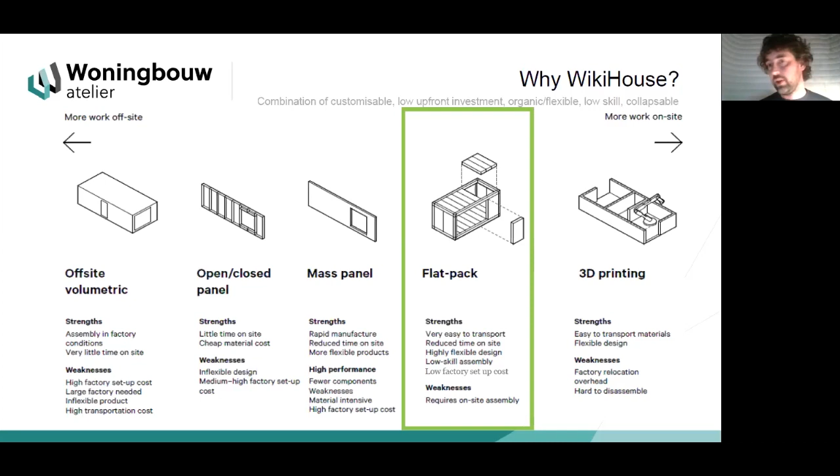And talking a bit more about that, the cost for setting it up, that's quite important to the actual product you deliver in the end. Because if you remember that offsite volumetric system, that needs a massive factory, that needs very high investments up front before you can actually start to produce. And because of that, continuous production is key. And because of that, it's quite top down, quite inflexible, but you can deal with big amounts.

WikiHouse is the opposite. So you need a CNC mill, CNC machine. They're already there. They're used by furniture makers or whoever wants to play around with a CNC machine. And that's the main investment you will have. And after that, you need a drill to be able to put your different WikiHouse elements together. So that's a very low upfront investment. And because of that, it can be more organic and more bottom up. And so you can facilitate the demand of end users much more.

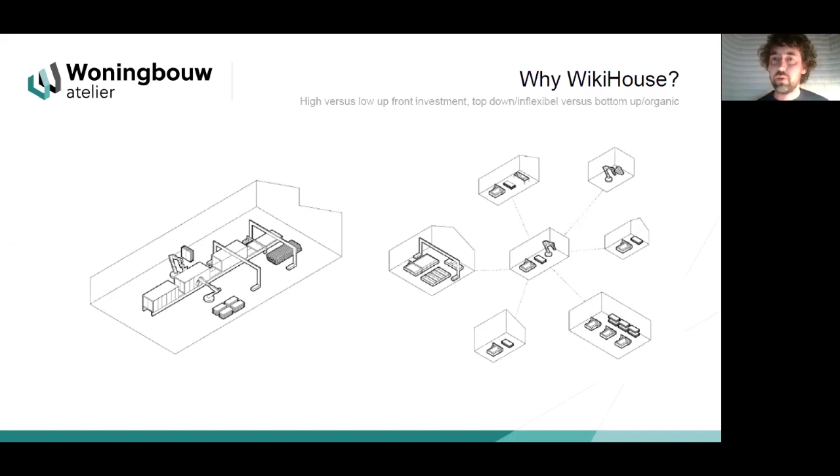Another reason it's affordable, mainly because it's a self-building system, so you can put it together yourself, which means you don't need a contractor, you don't have to pay laborers, etc. And well, that is needed because there's a big demand for affordable housing.

The house you see right now is a new build offered in Almere at the moment for almost 350,000 euros. It's a family house, and completely box standard, nothing special, and built by a contractor.

If you compare that to a house that we're building right now in Almere using the Wikihouse system, that is a house that is customized. It's built by the future owner and is going to cost around 235,000. So there's about 100,000 difference there. So it's much more

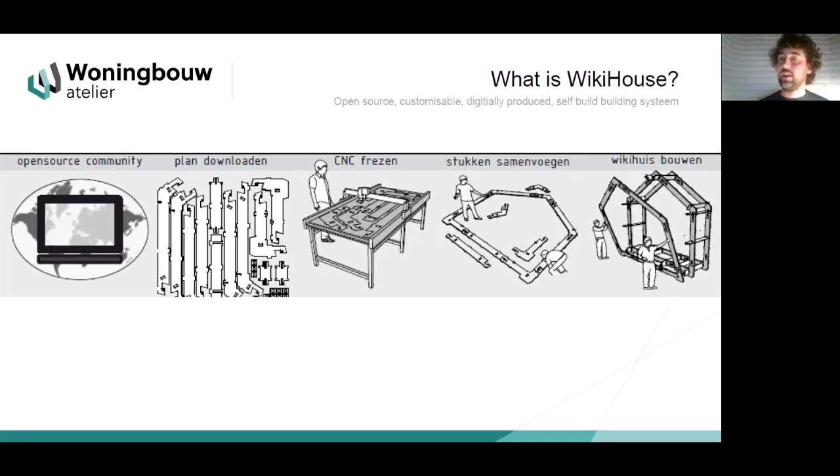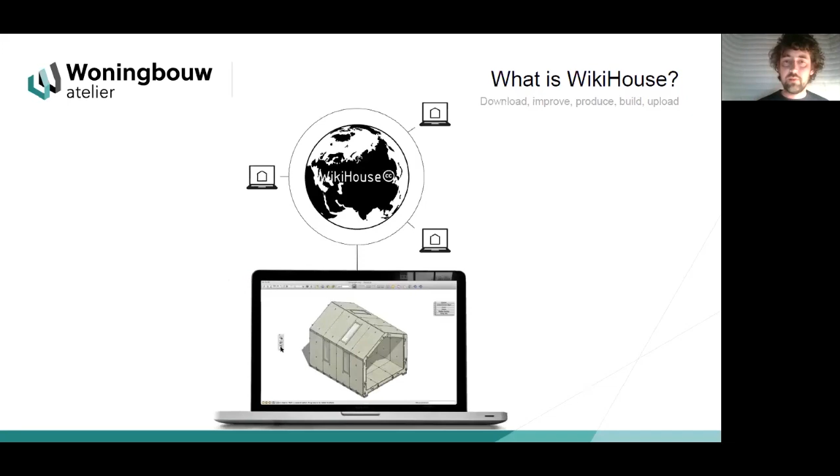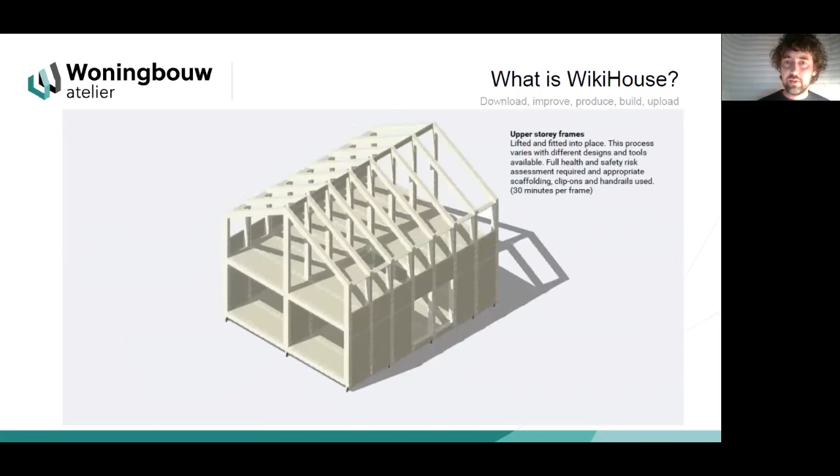skeleton of your house. It's open source, so you can use all the knowledge that's already available and supplied by others in the world, and use it for your own project. So download a design, for example. You use it to produce the elements. You start to put the elements together, and that's how you build the skeleton, the Wikihouse skeleton. Up to here is really Wikihouse.

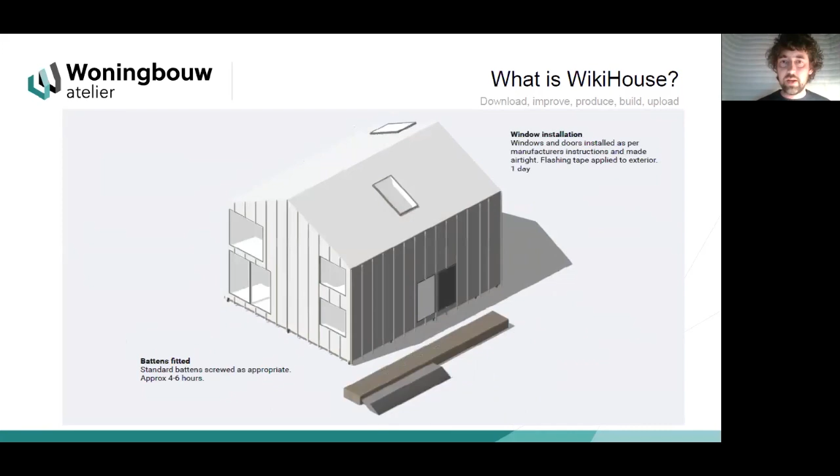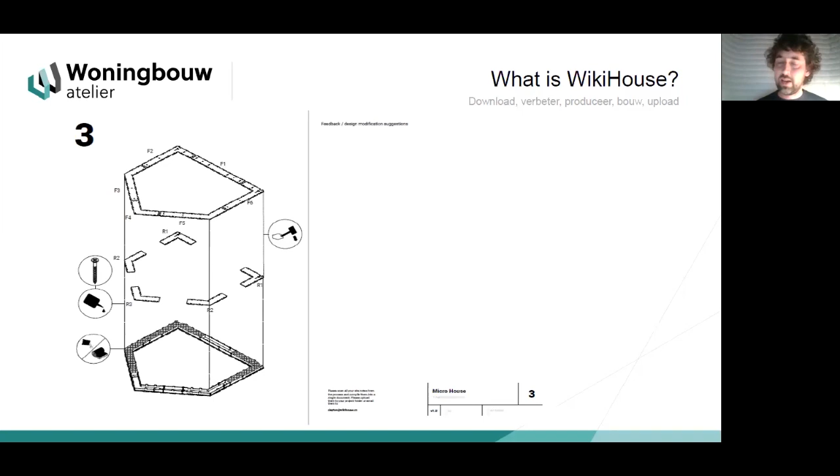After this, you finish it the way you want to finish it. So cladding, insulation material, installations, it's all up to you. Comes with a manual, bit like the IKEA cupboard manual. So it explains completely how to build the Wikihouse skeleton. This is a very important step.

After you've done your build, you just get all the data, the knowledge, the experience together, and you give it back to the Creative Commons, because that's how the system can become better and better and better. And someone else in the world can use that information to do their own project. So that's a very important step.

Now, we wanted to use the Wikihouse system in Almere, and we're doing that sort of in two projects. We did one in 2018, and we built a pioneer's house, which was a show and a test model. So a test model because we wanted to know if it would pass Dutch building regulations, but also a show model to just show to people that it actually leads to a house that works and looks nice and you can live in it, etc.

And it looks like a normal house if you wanted to. So those were the sort of two reasons to do this first step. We wanted to test it and show it.

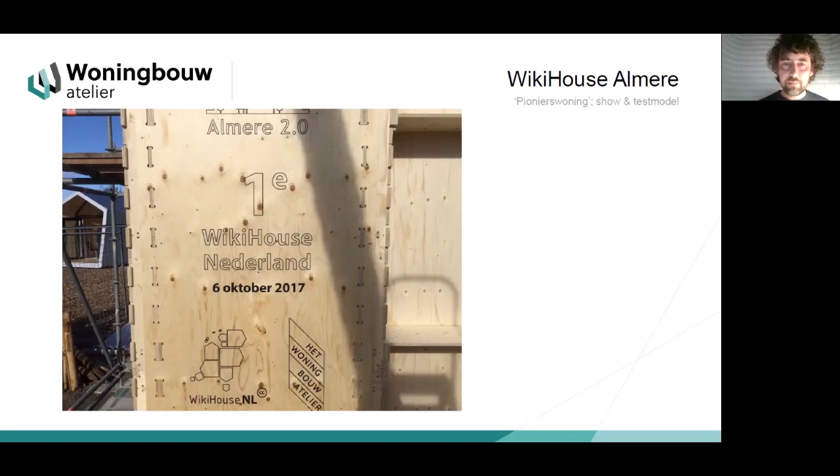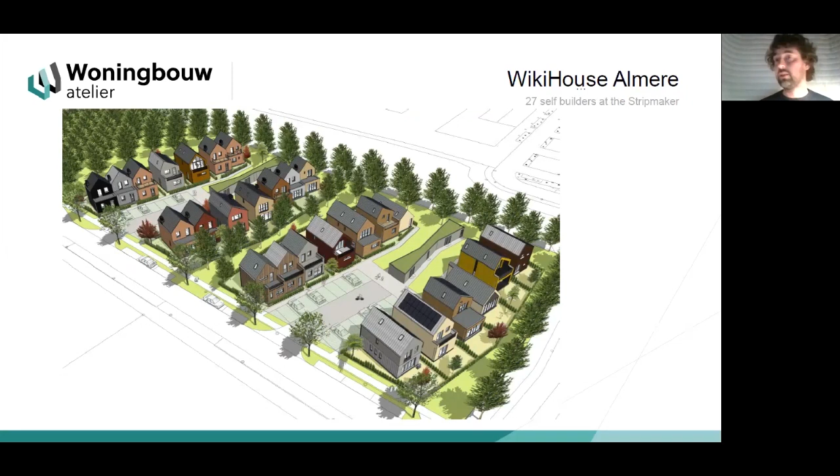Well, that was successful. It passed the Dutch building regulations. So the second part of the project is building 27 Wiki Houses with self-builders who finance it themselves, design it themselves, develop it themselves, and go and build it themselves. We're using Interreg subsidies, a European Union subsidy, to make it all possible. But actually, there's not a lot of that money going to the actual project, but much more to the process around it.

You see our self-builders that are building right now in the first phase. The first 9 of the 27 are going up right now. And they started building last July. And just a couple of pictures to show you how it works.

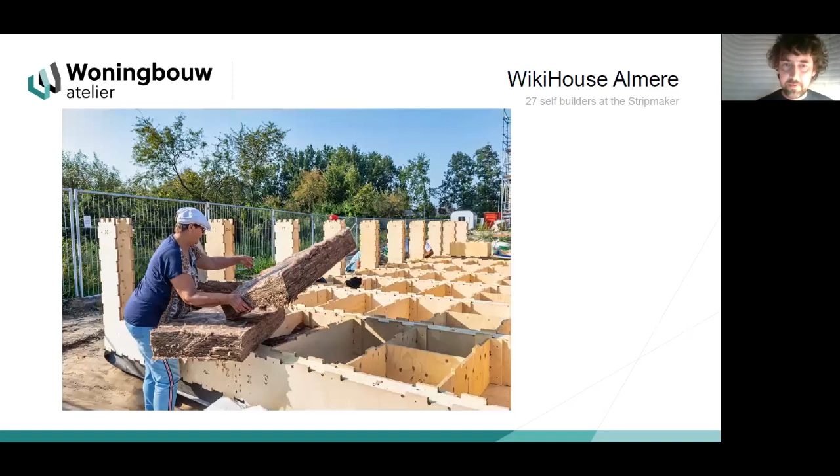Here you see the elements and the sub-assemblies which are put together indoors, on site, but indoors. Then these are brought to site and put together and insulated. And this is how the Wiki Houses are going up.

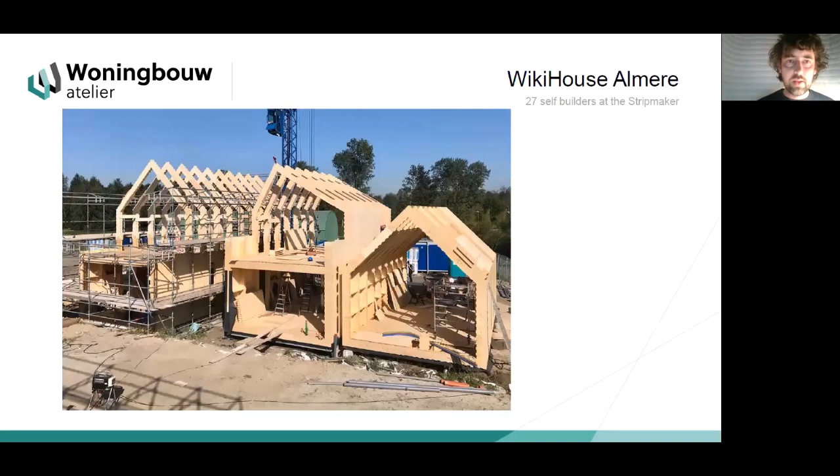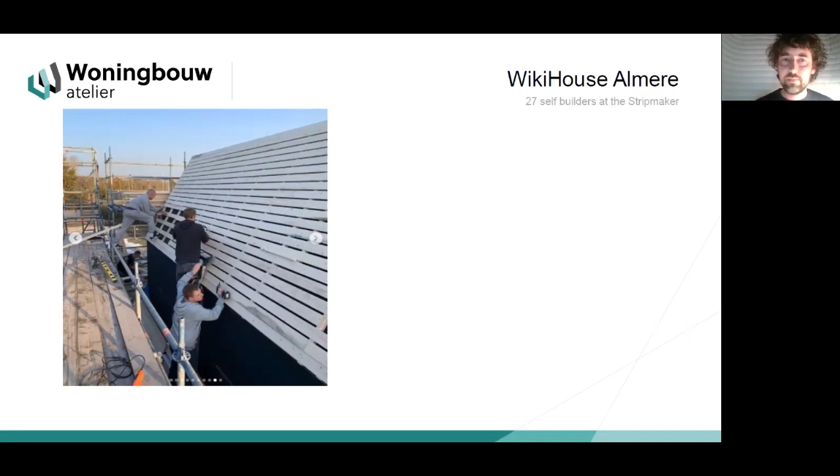These are all family members and friends that actually worked on this particular Wiki House. So these are all self-builders, volunteers, family members, people that don't have specific knowledge in building, but they can do it because it's made so simple that anyone can do it. Well, there you go. This is what it looked like about 4 weeks ago.

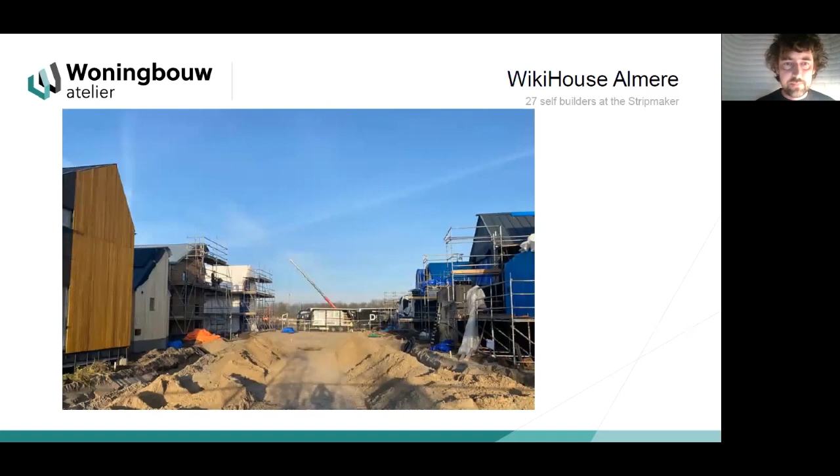We've started with the second phase, doing the designs in October. We just applied for planning, and we think we can start the build of the second phase, which is 18 Wiki Houses, in June, July this year. This is an overview of what it's going to look like. 27 houses in 2 phases.

We've got 16 future owners, but also 11 future tenants. So we've got a specific housing association involved that facilitates people that want to self-build but can't finance it. So they will finance it, and then the self-builders will rent the house from this organization. So that's 11 future tenants. The houses are 50 to 90 square meters living space.

Total costs in the first phase, so that's land development costs and building costs, range from 165,000 up to 235,000 euros. If you need a mortgage for, let's say, the 165,000, that will give you a monthly cost of around 450, 500 euros. On top of that, you've got the energy bill, but the energy bill is pretty low, so that will be around, let's say, 20, 30 euros. So the cost for housing for that 165,000 euro house will be around, let's say, 500 euros.

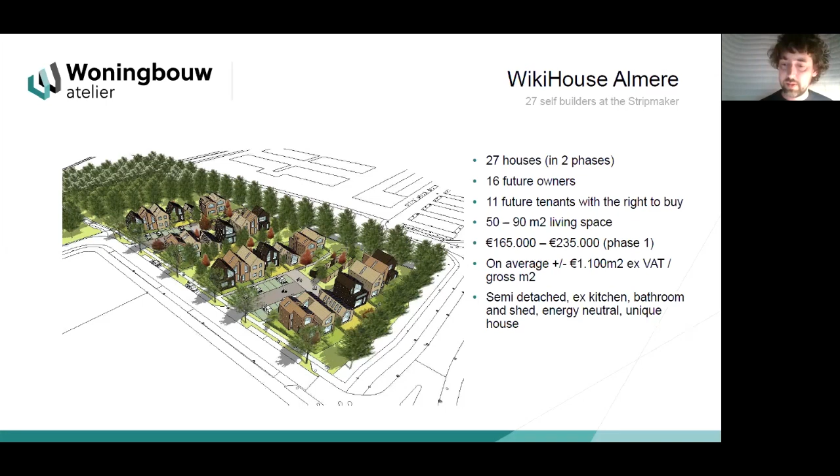On average, the costs for building are around 1,100 euros per gross square meter. And that's for a semi-detached house, excluding kitchen, excluding bathroom, excluding shed, but energy neutral, and a unique house because it's completely customized.

So this is a bit less related to the project, but a bit more about potential future projects and making that possible. We created a toolbox, which is a sort of library of modules which you can put together, so you can make your own design. And we know that all these modules work, so they're structurally sound. Max span is 4.8 meters.

They're all engineered. We've got the CNC files ready for most of them, not all of them, but for the modules that we have used up to now, we've got engineered CNC files. We know what the price is in Holland, of course, and they will be open source available. We haven't uploaded them yet, but that will happen. And our hope is that this toolbox and library is going to grow and grow and grow in the future. And the more it grows, the more flexible the Wiki House system can become, and the more varied you can start to design.

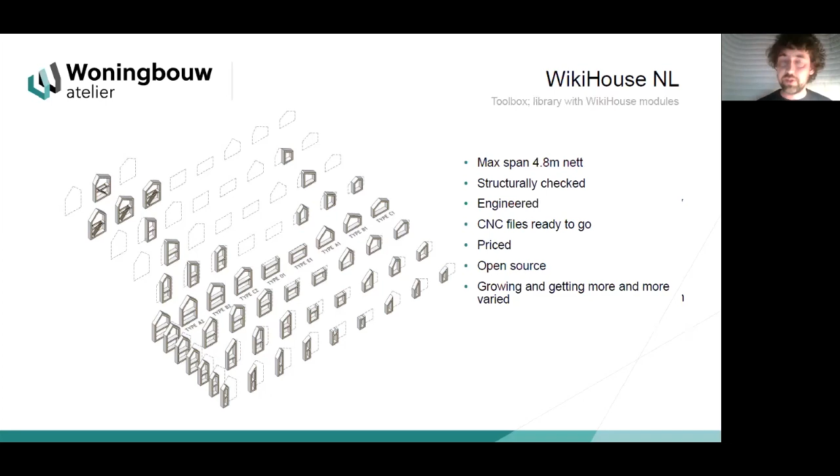This is an example of what you can do using these modules and the toolbox. And we actually 3D printed them, and these little modules were used in the design phase for the people who are building right now, and that worked quite well because you could see what it was going to lead to, not only for your own house, but also how your own house relates to your neighbors and what might happen with sun and shade.

And they were inspiring each other. It's like, oh, that's an interesting solution. I might do that too. So just playing around with that toolbox helps to make a better design, not only for yourself, but also potentially for your neighbor or the group.

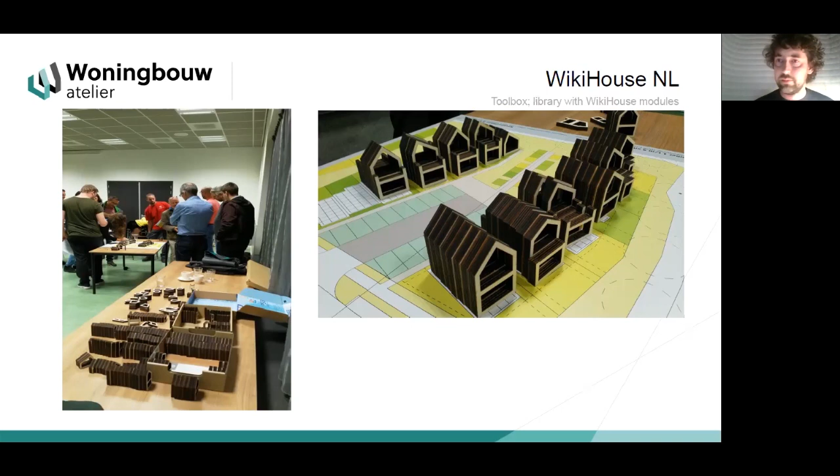We use the same toolbox to create a VR tool. So you can drag these modules you just saw onto your plot in VR. So you select the location, you select the plot, you put your modules on there. You can put interior walls in, you can put windows and doors in, you can adjust materials for cladding and

roof, etc. You can put furniture in, which I think is really important, especially for people that don't have design experience, who aren't an architect. The only reference point they have is the furniture that they have already in their house. So that's their reference point. So you need to be able to put that in the design and then actually walk around it in VR to see if your design works or not. And if it doesn't work, you adjust it.

So you can walk through the design you've made yourself in a one-to-one experience. The position of the sun you can adjust, so you can see how it works out with sun. And that's only for Holland, I'm afraid. But the costs change real time. So the moment you put an extra module on your plot, you see the cost rising of the development you're doing.

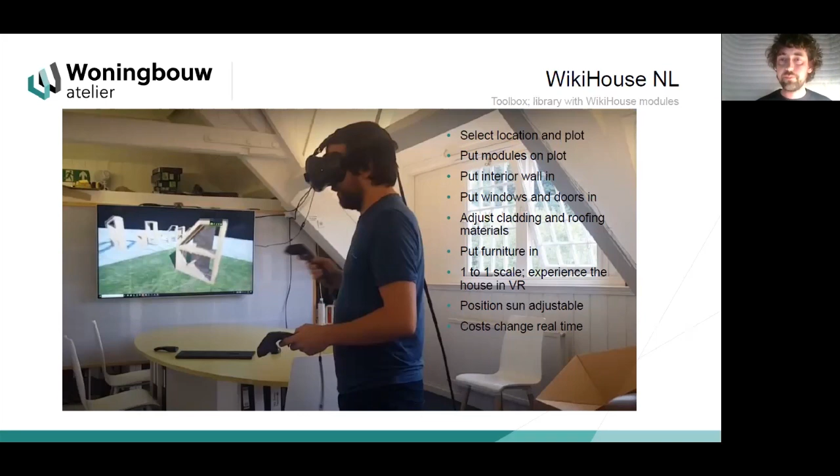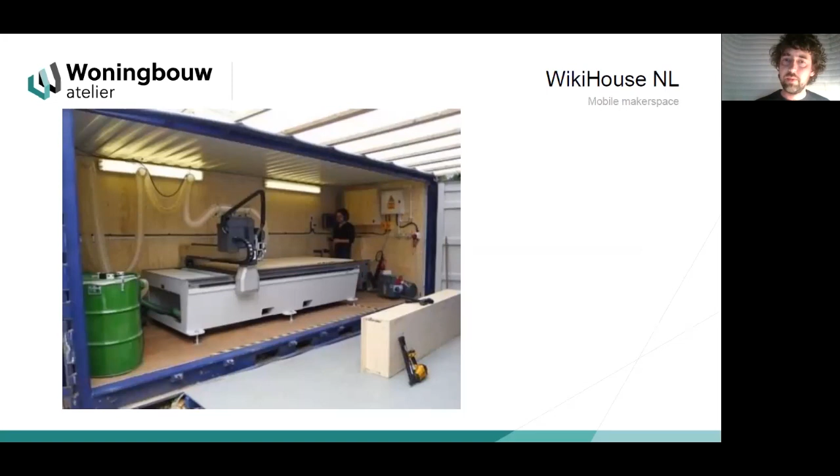We also created a makerspace, which is a container with a CNC machine in it, which can be hired, and we can just truck it to wherever the plot is, and you can cut your own files. So you can use this makerspace just as a self builder.

Now, what we've done in Almere is sort of hardcore WikiHouse, because the people that are building there at the moment have done everything themselves. So they did the designs, they did the development phase, they got their own finance, and they are building everything themselves. So it's really the hardcore version of WikiHouse, which we wanted to do because we wanted to test that extreme. That doesn't mean that all the projects that might follow have to be that extreme too.

And there's two things you could potentially change: the amount of work you do yourself and the amount of customization. And if you see them as an X and a Y, you can imagine a palette of options you might have playing with those two factors. So you can imagine a design that's completely not customizable, but because of that, really affordable, and you build it all yourself, then you end up at the really affordable side of the WikiHouse options you have.

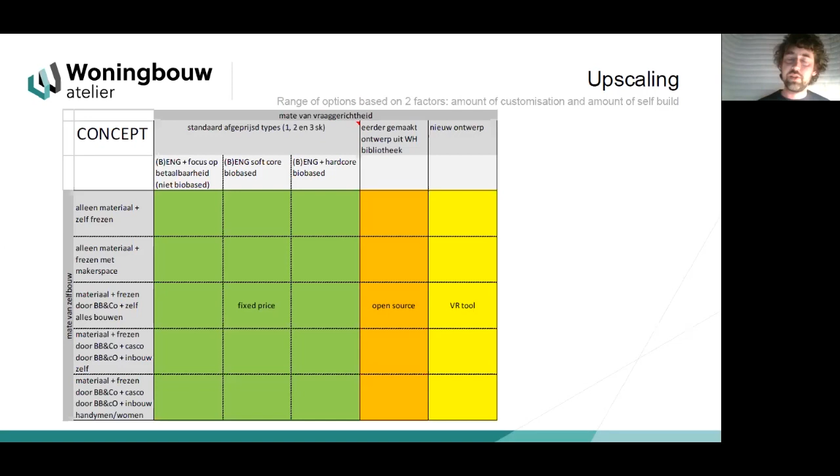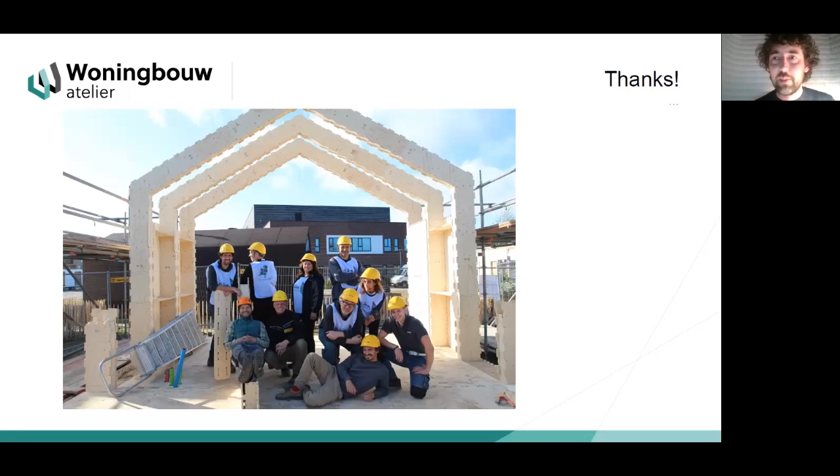Well, this is what I wanted to share with you guys about what we're doing and about the WikiHouse system and about the future of the WikiHouse system in Holland and potentially wider in the world. And yeah, let me know if there are any questions. And I think Bronwyn might do a bit of moderation of questions. Bronwyn.

Hey guys, yes. All right, let me start with some questions. Okay, so tell us about the WikiHouse Toolbox. Is it available? If I wanted to build a WikiHouse, what would the process be for me?

It's not available yet because we're still using it for the project that we're doing right now in Almere. But it will be available not too far from now, and we'll share that toolbox, including the data that comes with it, for example, the CNC files. And the idea is that you put those modules together, and by doing that, you can make your own volume, your own mass, let's say, and then fill it in, for example with the VR tool, the way you want to fill it in. So yeah, that's how it will work.

Yeah, I noticed that the current WikiHouse website says to wait for the new version to come out. So I guess this is going to include some of the exciting things that you guys were talking about today with the different modules and so on. That's great. Definitely.